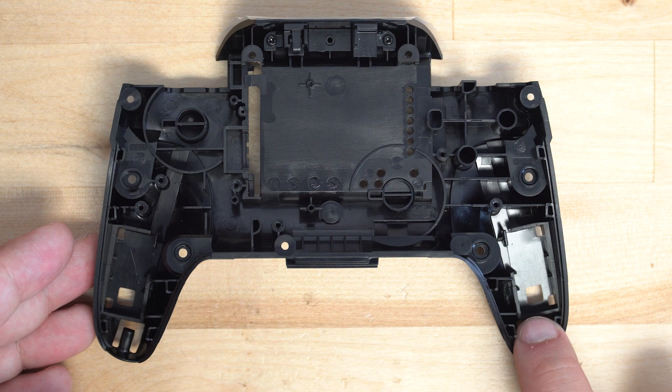We ran into a problem. With our ProGCC controllers, we are going to be using coin-style rumble motors instead of the Nintendo Switch Pro Controller's LRA-style rumble motors. That means we need to come up with an adapter to make sure the rumble motors will sit in the controller without vibrating everywhere. Let's get right into it.

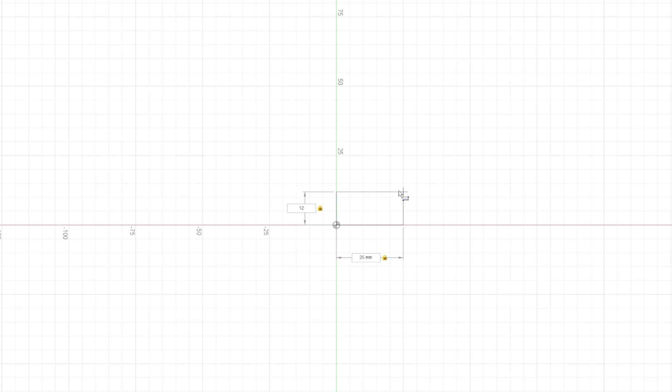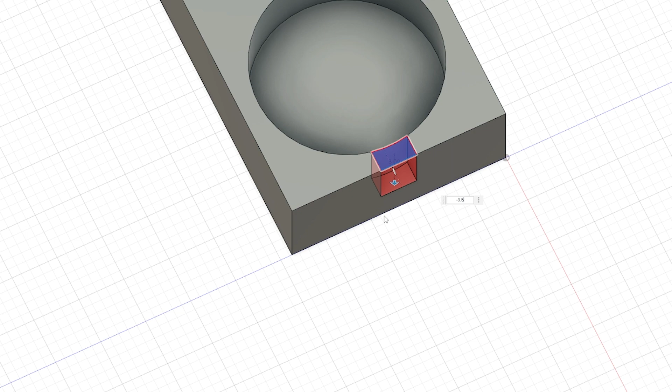The first thing I did was grab some measurements. I recreated the rectangular piece in Fusion 360 that'll sit inside of the Pro controller. I then added in the circle for the rumble motor and cut out all of that material. Finally, all that was left was a space for the wires to come out, so I cut that material down as well. Once all of that was cut down, I could go ahead and get our file ready for 3D printing. I went ahead and sent it away to the 3D printer for our samples to be made.

And a short 10 minutes later...

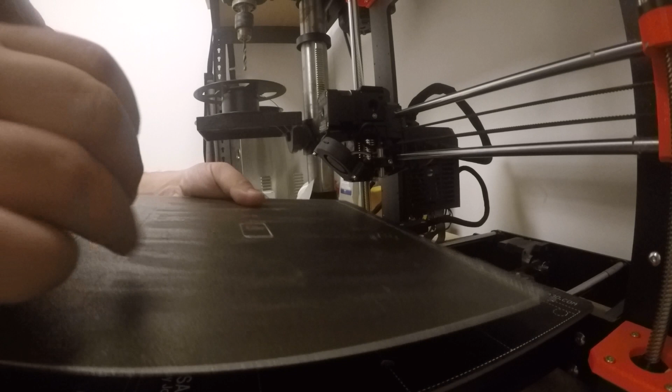Back at the controller, we can go ahead and see that our printed piece is actually too wide and sits on the edge of the plastic on either side depending which way you put it in. So we'll have to go back to the drawing board and modify our design to make it fit better.

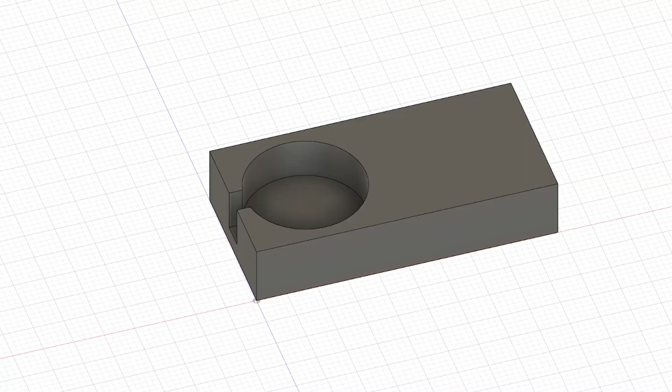Back in Fusion 360, the first thing that I did was expand the hole for the wires to come out of. It needed to be a little bit bigger to make the wire passing through a little bit easier. I then went ahead and cut the entire thing down into just a square. This made it so I could avoid the sharp fins of plastic in the bottom of the shell.

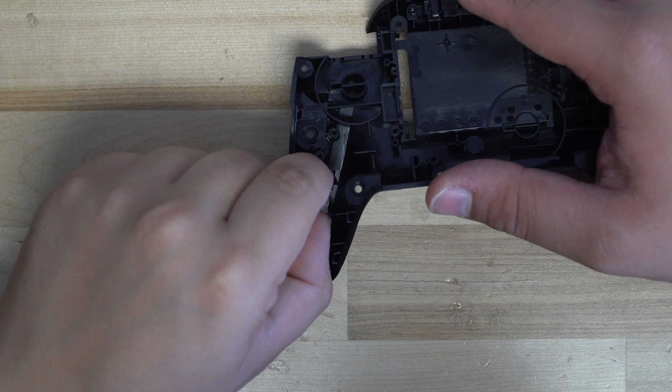Back at the controller, let's go ahead and test out our new adapter piece. Unfortunately, it's still a little bit too wide, so we'll need to go ahead and slim it down even a little bit more. Let's also go ahead and try and fit in our rumble motor. Notice that it does somewhat fit, but the wires are still getting caught, so let's go ahead and make the opening for that even a little bit wider.

Back at the controller, we can go ahead and see that it fits this time, and it's being held in by those plastic tabs on the bottom, meaning that this is nearly a perfect design. Let's go ahead and test the coin inside of the mount. Everything seems to fit okay, but it seems like the adapter still needs to be very slightly smaller, so let's go ahead and make that change.

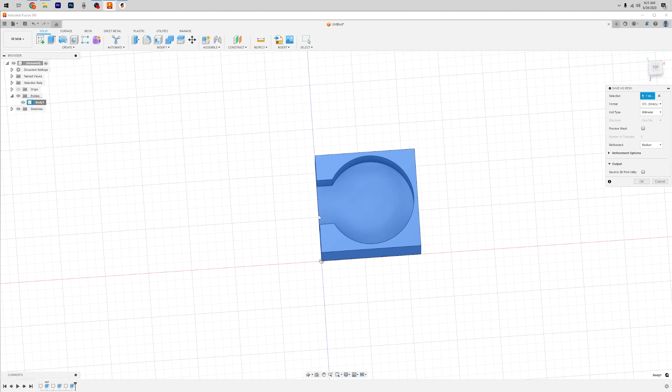Now let's go ahead and test our rumble motor in the new adapter. It is a tight fit, but everything seems to fit well. From there, we can test it inside of the controller shell. Since everything seems to work, we now have a coin-style adapter for the OEM Nintendo Switch Pro controller shells.

The fun doesn't end there though. We also got a few of them resin printed for our samples. We may end up having to provide these with the kits for the controllers, as the controller shells didn't come with the adapters from the factory like they were supposed to. So if you end up getting an adapter like this, just know you got the exact one made in this video.